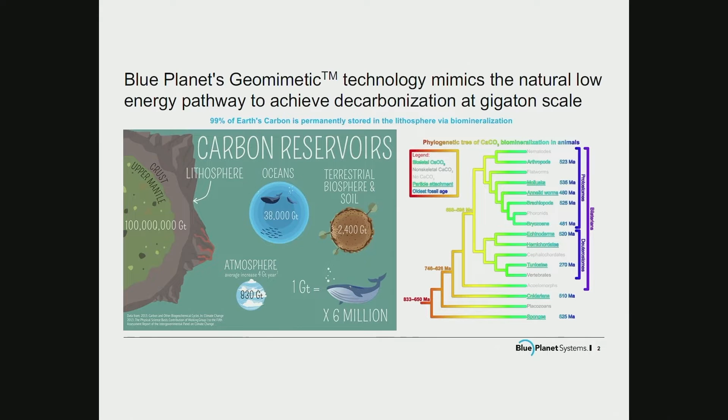The other thing about all that limestone is that there's about 55 billion tons of rock mined every year globally. And it's not just mined, it's mined, processed, moved, used and paid for all over the world. In the poorest countries, in the richest countries, they're building roads. And frankly, the poorer the country, the more government generally has control of infrastructure spending. So it puts this huge procurement power, even in the poorest country in the world, to mitigate billions of tons of carbon, only spending money they were already spending on infrastructure anyway.

So it's something we've determined is really one of the real key tools. And I should say that I've founded other companies that made cement. And I'll explain why. But we think by making the limestone rock, we can actually get processes in place around the world that can mitigate huge amounts of CO2 profitably, economically, in a sustainable way, even in poor countries without subsidies.

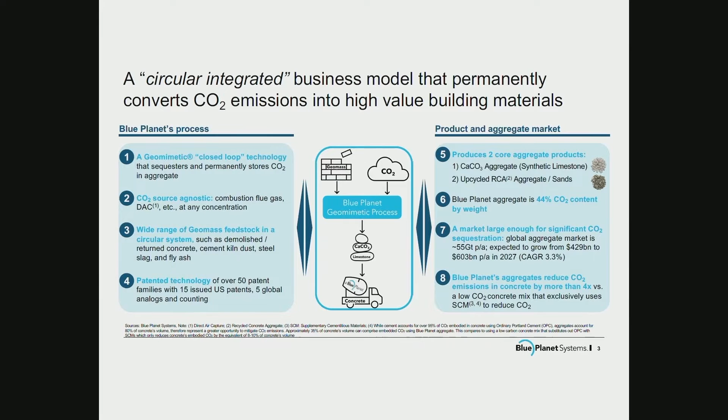And anything that's going to be sustainable is going to have a big circular component integrated into it. What we do is we take feedstock that contains calcium and CO2, and we make limestone directly, and then we use that limestone as the aggregate in concrete, which is the most used building material in the world. And it's ubiquitous everywhere.

So fundamentally, what we're doing is different than everything you hear about in the IRA Act, where what's being subsidized by the government is to capture CO2, put a lot of energy in to purify it, turn it into a liquid, build pipelines to move it, then inject it underground where it's going to form carbonate minerals permanently under the ground.

And there's new legislation, it's called 45Q, that was approved by Washington, that's going to pay people, I think, $90 a ton for doing that. And there are whole businesses, mainly out of the oil industry, that are springing up to take advantage of that tax credit.

We don't do anything like that at all. What we do is just in one step, we do what happens to that 100 million billion tons of carbon already, which is we form carbonate, CO3, which is a spontaneous reaction. And then we go directly to limestone, which is what happens. That's what all the organisms that do biomineralization do.

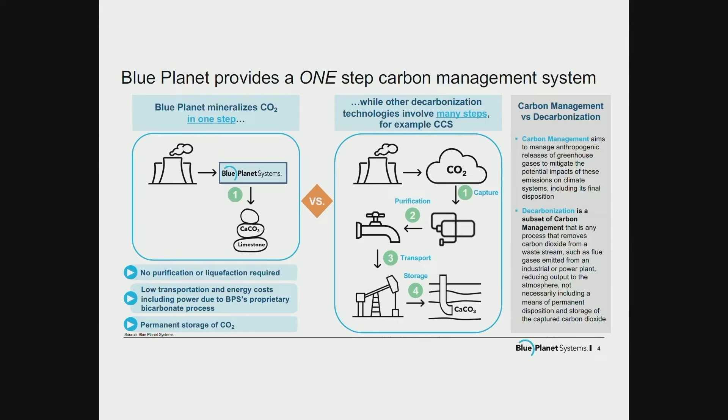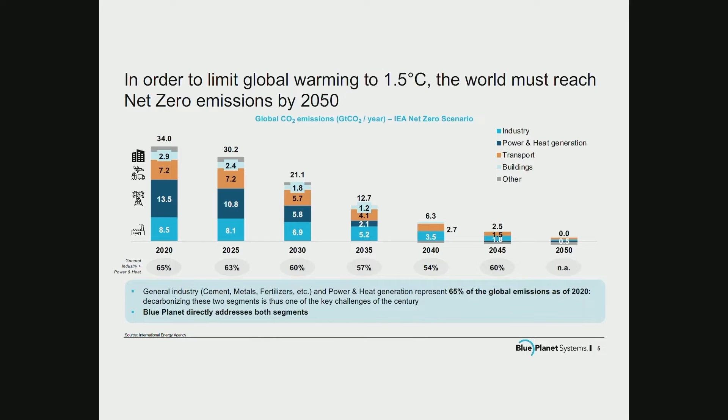So if you look at the different sectors, we know the IEA has charted out a course to lower everything from power to industrial to transportation over the next few years to get out to 2050 when we're net carbon neutral. And major players, major CO2 emitters all over the world are signing different pledges about lowering their CO2.

And that's where you really need to get to, is the people that are putting out the CO2. It's not small players. One company can put out tens of millions of tons of CO2. And so that's really where you want to go to address the real issues.

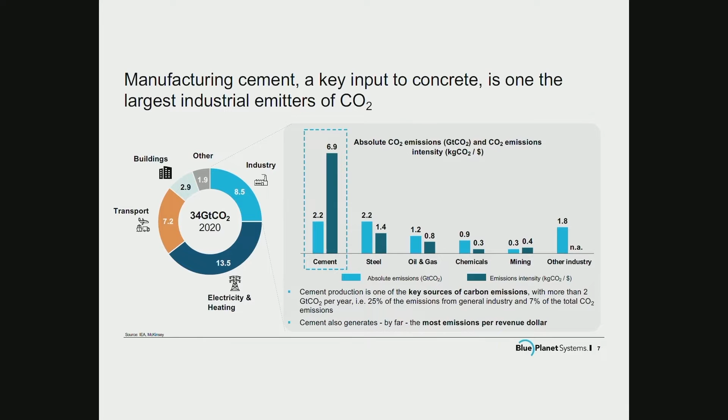Cement, for example, in the industrial sector puts out quite a bit, about 2 billion tons of CO2 every year. And it costs them a lot of money, so it's harder for them to argue to spend money on mitigating CO2 coming out of their sector. But all these sectors are putting out enormous amounts of CO2. About, we think, 30-something gigatons.

So here's basically what we're talking about doing, is taking CO2 from buildings, tailpipes, electricity and heating, industry, putting it through the process, and making 55 gigatons of limestone, and basically replacing all the mined limestone, so replacing open pit quarries with what we call urban quarries, and making the rock where the CO2 is being emitted from the raw materials that we have there. And I'll explain that a little more in a second.

But what's important is there's already 55 gigatons being bought, purchased, and moved today, and most of it's limestone. So we're not really changing things up very much. Instead of mining it in British Columbia and barging it down to Los Angeles, we're going to form it right in Los Angeles.

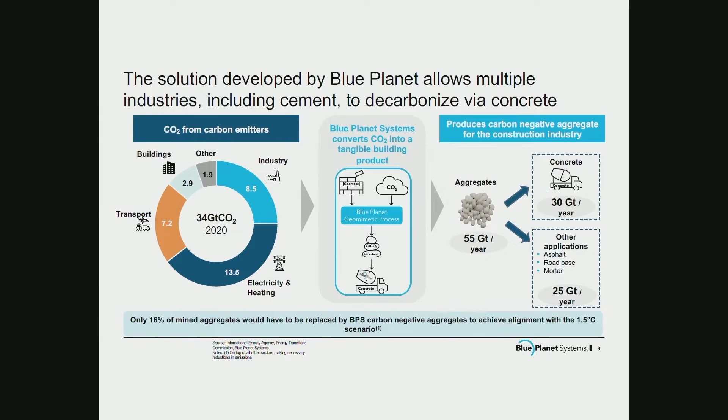Now, when people think about concrete, which is where we're going to store this limestone, concrete is like 10 or 15% cement, and it's about 70 or 80% sand and gravel. And we're making the sand and gravel component, so we're making the largest component.

Now, what most of us have done, and I've founded a company that did this, is work on the cement component. And the reason is that if you look at where this embodied CO2 in concrete is, it's not in the aggregate, it's not in the sand and gravel, because that was just mined and moved. It's in the Portland cement, which is the binding phase. So it's responsible for 96% or more of the carbon footprint of concrete. So it makes sense to dive in and try and get rid of the carbon footprint of Portland cement.

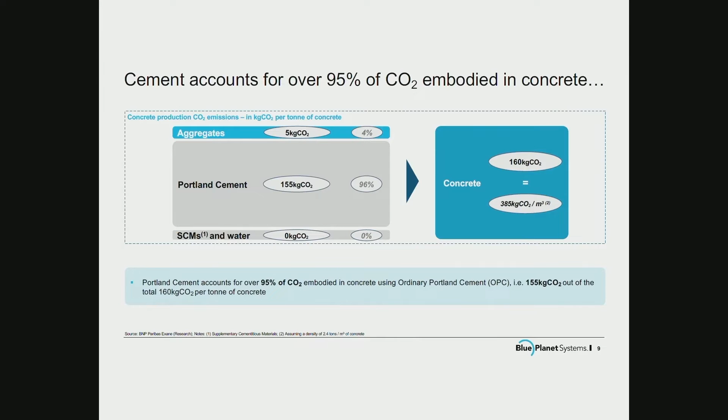But if you look at the volume, most of the volume of concrete, the most used building material, is actually the sand and the gravel. So if you really want to store a lot of CO2 somewhere, you're doing much better with the sand and gravel component.

Now, something I don't want to skip over is the molecular weight of calcium carbonate, which is what limestone is: 100 grams per mole. And the molecular weight of CO2 is 44 grams per mole. So if I have a ton of limestone that we've made via this process, I have 440 kilograms of CO2 that's now permanently sequestered in the crystalline state. So of this 1,000 kilograms, 44% of that is CO2 that's been captured and mineralized, which goes way beyond any sort of potential of any carbon captured material that you can find.

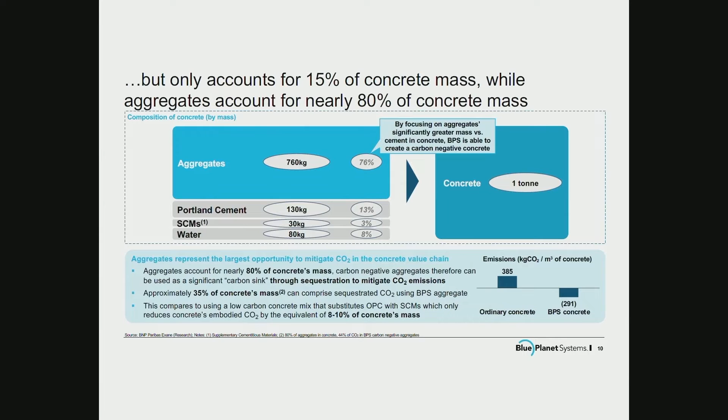And if you look at the concrete industry's current approach to address their problem, they're putting out 2 or 3 billion tons of CO2 a year, and they're trying to address it with energy efficiency measures, burning tires, putting a substitute in for the cement. They're recognizing they need at least another 1 billion tons of new technology and changing buildings to get to their goal for 2050, which is 700 million tons.

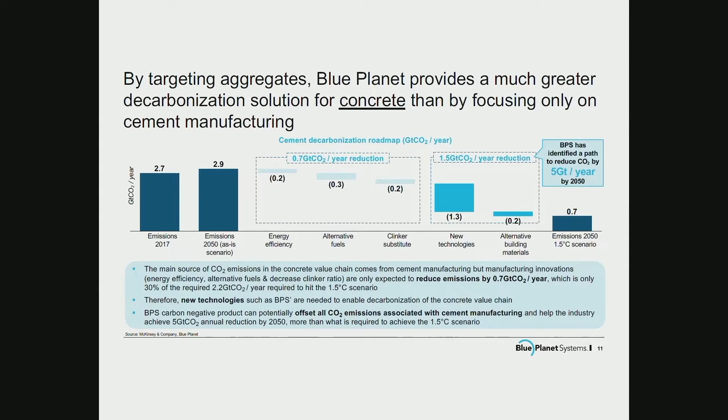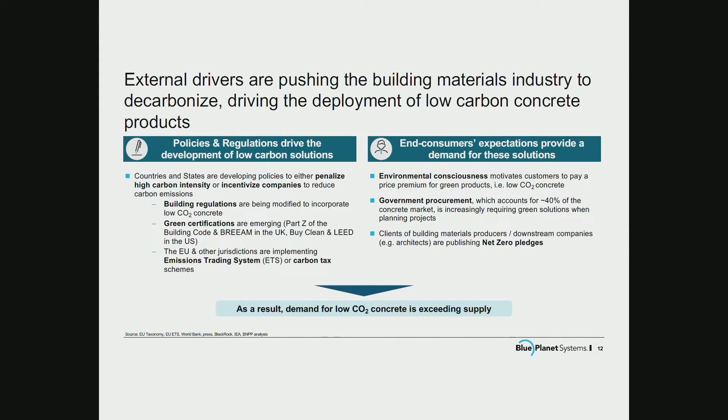And the governments are doing a lot of interesting things. There's a lot of new policies coming through in building regulations, certifications, to encourage people to use lower carbon concretes, because in most buildings, concrete is the big player in terms of the carbon footprint of any building.

And if you look at aggregate, for example, the United States is mining quite a bit of aggregate, as are all countries. So there's an existing market for the aggregate. So what we're planning to do is, if this is the CO2 and this is the amount of aggregate in the market: by 2030, we're planning to be able to capture 200 megatons of CO2 a year. By 2050, over 5 billion tons of CO2 a year is our current goal.

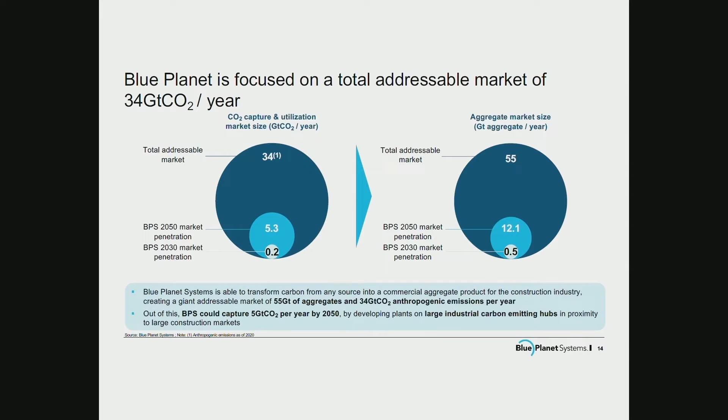Well, that 5 billion tons of CO2 will make 12 billion tons of limestone because of the difference in the molecular weight. And that's where we're focused right now, and that's our plan. Now, there's a large number of folks interested in this problem, in both the removal of CO2, but also making the built environment less carbon intensive, and even carbon negative in our case.

So people are working on the aggregates, and that would be us. We're working in this area, making synthetic aggregates. People are working in new cements. There's a whole plethora of companies trying to replace cement. The problem with replacing cement, and I've done this before, I built a whole factory and repaved Highway 1 in California with a new cement.

Cement is highly regulated because it's always curing. And practitioners want to see a decade, 2 decades of experience before they're going to implement anything. That's not true with aggregate. Aggregate is just rock and sand that is static. There are a number of companies trying to make things to supplement cement, but not the cement itself.

And then there's some other companies that are buying that purified, liquefied CO2 that was going to get injected into the ground and fumigating wet concrete with it, which sounds like a fantastic idea. Unfortunately, less than 1% of it actually gets in the cement, and most of it just blows off into the atmosphere.

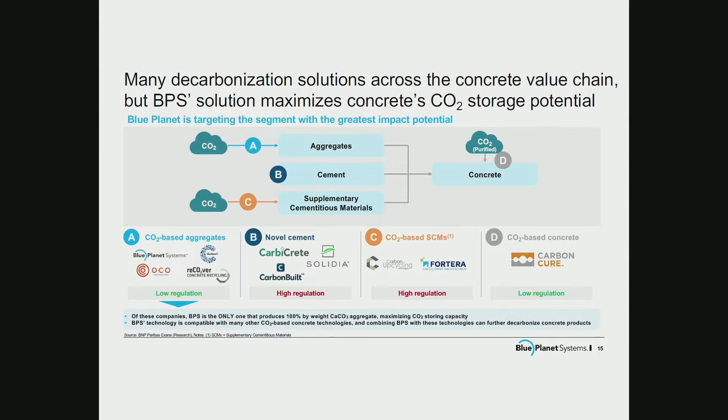One of the biggest problems, and it sounds like the people in this room probably are aware of it, is there are a lot of claims about how green something is or what a great thing for the environment it is, and most of the time they don't always hold up to their claims. And so there's a new system that's been put in place. It was published by the Canadian Standards Association, who monitors a lot of the ISO standards for carbon sequestration and that kind of thing, called the Carbon Star Rating, which is now a US-Canadian bilateral standard, and it's going to a global standard. But what it does is it tells you the carbon footprint of a yard of concrete.

So, for example, we're working with LinkedIn out in Silicon Valley, and they're building a 200,000 square foot campus, and they have to make it carbon neutral, which is impossible given all the steel and concrete and all that. What they did was really smart. They brought us in, and then they brought 2 internationally renowned architectural firms. And they said, look, we have to build this building carbon neutral. So how much concrete can we have? How much steel can we have? How much glazing can we have? So they designed the building based on the carbon footprint that would result from the materials they were using before they designed the building, which I thought was really smart.

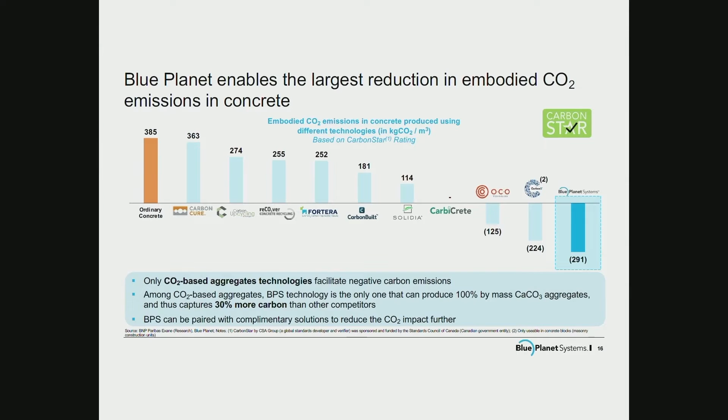And by looking at things that way, it allows people to think about it quantitatively, which is what you really need. Because otherwise, someone can just fumigate a fraction of a percent of CO2 and claim it's green and everyone's happy. And that's changing.

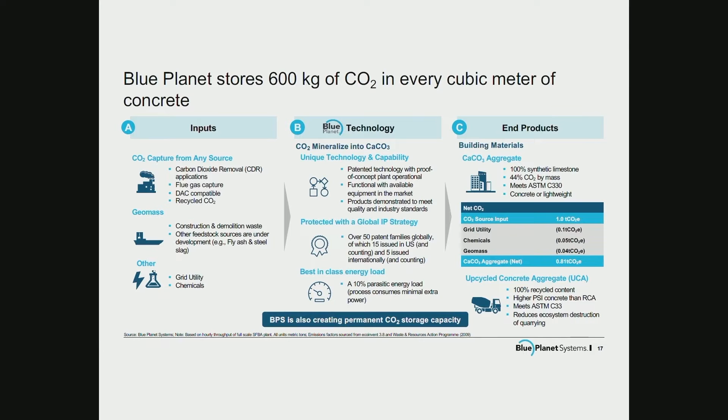So we're now looking at concrete more as a storage reservoir for carbon dioxide. And the reason that's significant is it's ubiquitous. So if every time people are pouring concrete, they're also sequestering CO2, you're riding the wave on the most commonly used material in the world. And that kind of changes the way engineers might think about concrete, because the way we're taught to think about concrete today is it's bad, because it has a big carbon footprint.

We were up on the YouTube building with McDonough Architects, which is a well-known architectural firm, and the structural guy came in. He said, "This is great. I've cut the amount of concrete in half." And he'd requested very strong concrete. And we had to say to him, "No, you actually were supposed to double the amount of concrete, because the more concrete you use, the more carbon we can offset with the steel and everything else."

So the whole way an architect or a structural engineer would think about the use of concrete requires that they take into consideration that, and there's other reasons you might want to minimize the concrete, but you're not necessarily just trying to get rid of concrete. In some cases, you may want to increase the amount of concrete to have more carbon negativity. And that's what we're seeing in the interactions we're having.

But there's a big circular component of it as well. So to make concrete, we need coarse aggregate and sand. We need cement, water. And the aggregate can come from the Blue Planet process, which I'll show you. But it does end up in concrete, which gets used, and at the end of its life, we've actually taken concrete and put it back through the process to make more aggregate.

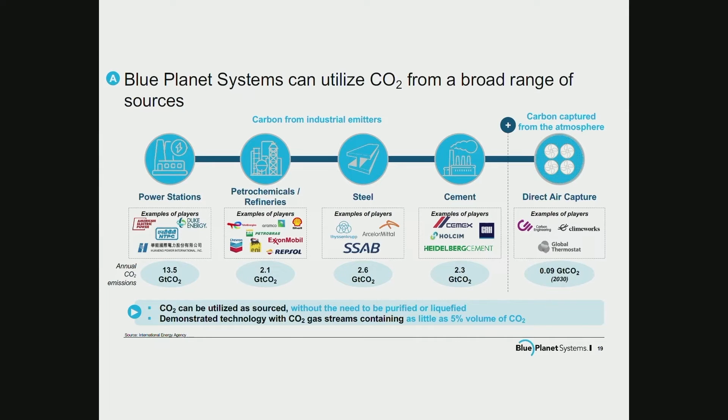So we're working with a broad range of sources. From direct air capture, you get pure CO2. Cement plants are about 30% CO2. Steel varies. Refineries have a steam methane reformer that puts out purified CO2. So we're able to capture the CO2 from a broad range of processes. Another technical point that we think is going to really change the way we manage CO2 is we don't purify it to liquid CO2. We just turn it to a bicarbonate aqueous liquid, like Perrier. That opens up a lot of avenues that aren't currently available.

And just a little background, if you take a ton of CO2 and make mother of pearl out of it, that has a volume of 1 cubic meter. If you compress it into a liquid, it's about 1.1 cubic meters. If you make it into a limestone porous aggregate, it's 1.6 cubic meters. If you make it into a bicarbonate solution of various concentration, it's about 11 cubic meters. And if you make it into pure CO2 gas, it's 25 cubic meters.

Or we have a plant at a natural gas-fired power plant, and we have to bring in 80 cubic meters to get 1 ton of CO2 because it's dilute. Or if you're doing direct air capture, you have to process 1.25 million cubic meters of air to get 1 ton of CO2. That's like your stadium here.

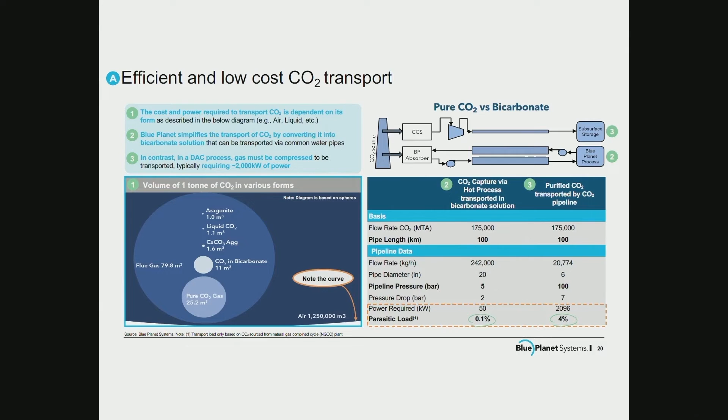The classic method by which most carbon is planned to be managed in the future is called CCS, carbon capture and sequestration. You purify it, liquefy it, compress it, move it out and inject it underground. If you compare that to what Blue Planet's doing, we send out a solution, we capture the CO2, and we send it back, and it uses about 1/40th the amount of energy to manage it that way. And this has a lot of important implications for how we're going to manage this on a very large scale. So I'll show you.

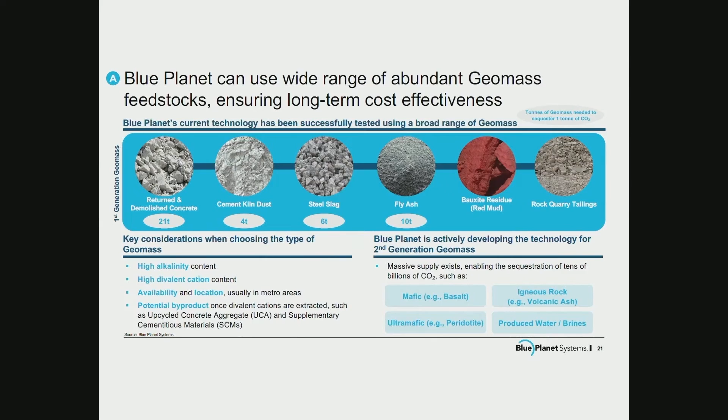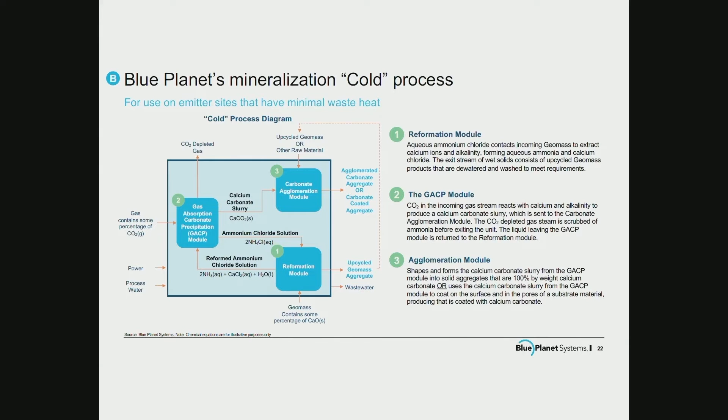We use various raw materials. In San Francisco at our plant, we use returned and demolished concrete. We bring it in, dissolve the calcium oxide out of it. There's a number of materials that are available, including different rock types that we use. The process itself is really pretty simple. We dissolve calcium oxide out of waste materials. We put it through an absorber. We make a calcium carbonate aggregate.

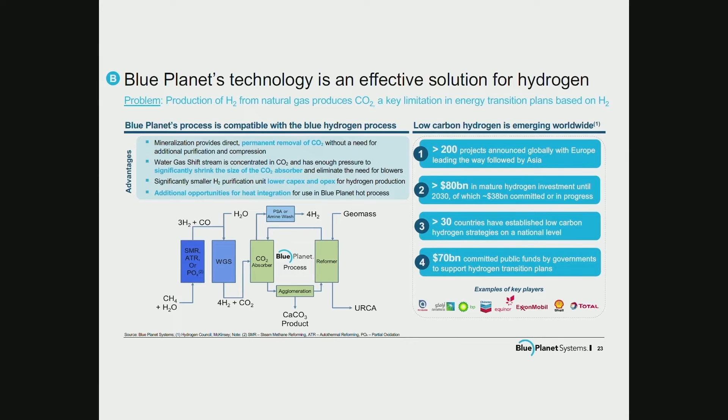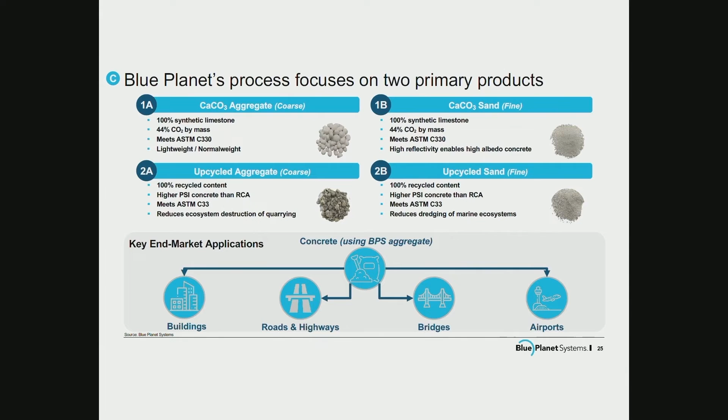We also have been able to plug into hydrogen generation as well. Instead of pulling CO2 just out of flue gas, we can pull it out of hydrogen from certain processes, which is really going to make blue hydrogen much more available. The products we make available to the concrete industry are sand, both coarse and fine. And in this case, we've used demolished concrete as our calcium source, and we're still left over with the original aggregate that was in it, which can also be reused and recycled.

The way this is going to deploy globally, like we're developing one of these in Singapore right now, is we're putting together carbon emitters, feedstock providers, and off-takers of building materials, all together into one entity.

And it turns out that this doesn't really increase the price of a building hardly at all, which ultimately can determine whether it's going to be adopted or not. You can increase the price of the building by 0.5% and bring the concrete to total carbon neutrality.

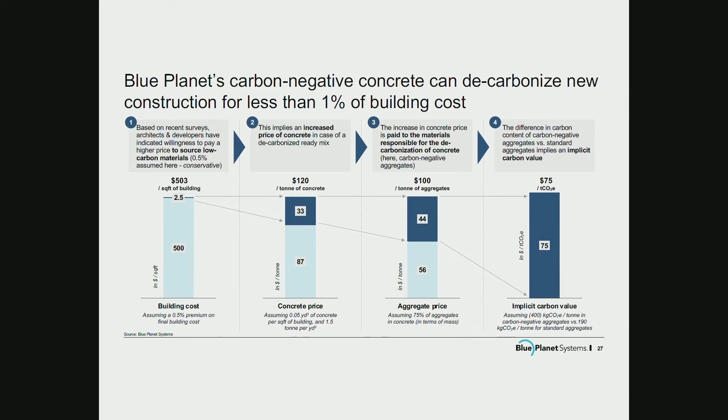So if you ask Google, who are desperately trying to lower the carbon footprint of their data centers right now, or AWS or any of these people, is it worth 0.5% increase in the cost to be carbon neutral? They'd just say absolutely, compared to a carbon offset or something else they need to do. So it's a very workable model.

Just to kind of show the proof of it, we did a big part of Terminal 1 up at SFO, San Francisco International Airport. And they use the Carbon Star rating, the one I showed you earlier. And to even bid on the concrete job at SFO, you have this one goal where the carbon footprint of the concrete has to be 200, which means 200 pounds. Now remember, there's 600 pounds of cement in there, so they're lowering the carbon footprint by 2/3 already, just to bid.

And then they have what's called a reach goal, which is 0, so 0 pounds carbon footprint per cubic yard. And then they have a regenerative goal, which is negative 200 pounds per cubic yard. And if these bids come in at the same price, the lower the Carbon Star number, the more preferred it gets in the procurement process.

So they're providing a quantitative means to encourage procurement of the lowest carbon materials by using the County of San Francisco's purchasing power, which is way more powerful because you can do that at any airport in the world. You don't need a government to say it's okay. So it's super powerful.

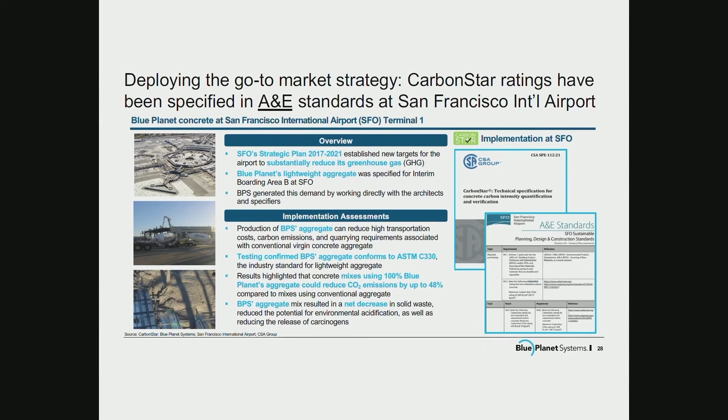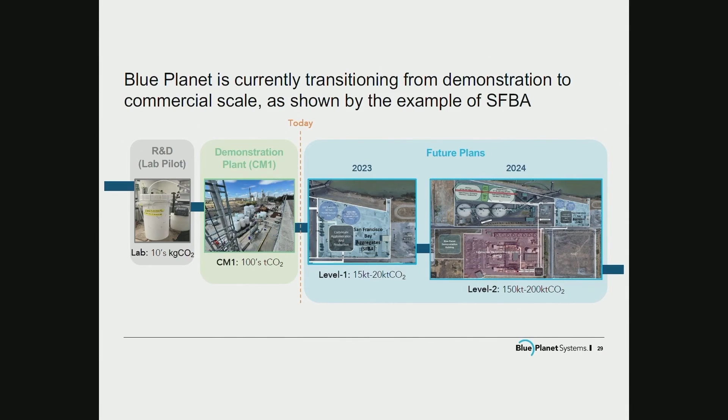We're expanding further, and these are the pipelines taking the bicarbonate solution from capturing it from the flue gas. This is the power plant. From the power plant, taking it over to our site. We also have a 10 million ton bulk handling facility. And this is the bay where 75,000 ton Panamax vessels can come up and get huge amounts of aggregate. And so we run this plant regularly, and that's where we're making the limestone right now.

But there's been an enormous amount of interest. We have projects going in a number of spots around the world right now. But to end, I just want to show you the manifestation of this, because we're not just offering a new product. We're offering a whole new carbon management system that's actually scalable and sustainable and isn't dependent on subsidies from the government.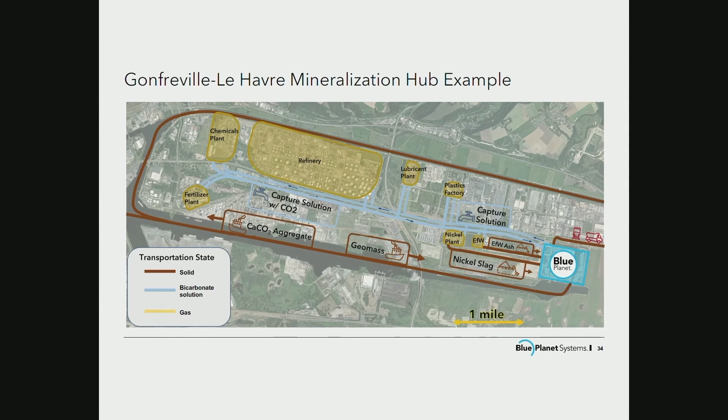You can do this in a few months. You can go into an industrial site and pipe it up and get going, which totally changes the way we think about it, because anything that isn't going to happen by 2030, no matter how good it is, there's a problem there. We need to be doing major mitigation by 2030.

And these ports are all around the world. And what's really interesting is there's this class of ports called pre-Panama Canal ports that have a certain draft that a lot of ships can't get in. And they're starving for business. And so there are all these ports with all this infrastructure that we can literally just move into really quickly. So this rapid implementation, we think, is really important. But I better stop there.

Well, I didn't know you were Brent, the Carbon King Constantz. It's like, geez, you really have a sustainable solution. Like maybe the best. Yeah. So let's give a round of applause here. Are there any burning questions here? I know I got a few, but I'm probably going to save them for afterwards. You got one here? Okay.